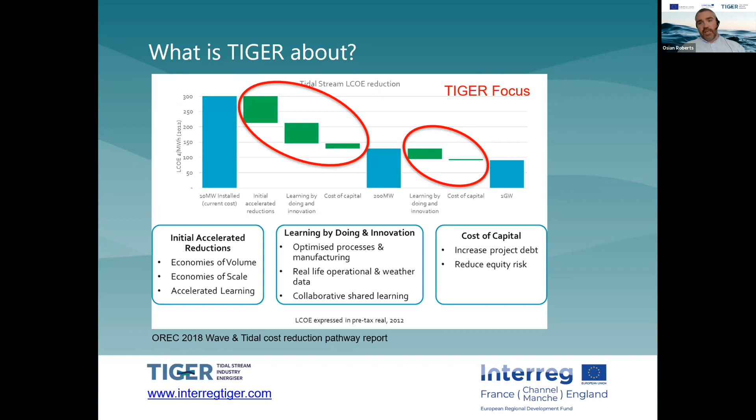And if you couple these things with a learning rate, you'll see that by the installation of gigawatts of capacity for our industry, we're looking to bring the cost of energy down to £80 per megawatt hour. And to do that, Tiger has this range of work packages, which is underpinned by knowledge transfer and the collaboration between technology developers and academia.

So the first one, we're looking at learning by doing, which is work package 1, tidal energy site development and deployment in those respective areas I pointed out in the slide earlier.

Second, work package 2, sector and technology development, and bringing in these innovation aspects to the sector and working together with supply chain to provide that innovation and to improve component efficiency, process efficiency, and form clusters that can enable the development of our industry.

Cost reduction analysis, where we'll bring all that learning together and form an evidence case rooted in policy, which can act as a robust base to bring commercialization into the fore for our industry.

We're looking to work with the supply chain, which is why we're here right now, specifically on the development of optimized components and processes. We're open to working across all organizations from across sectors.

And I think the last thing to say is that we would like to collaborate as part of Tiger. There's an opportunity to collaborate with all like-minded projects and associations.

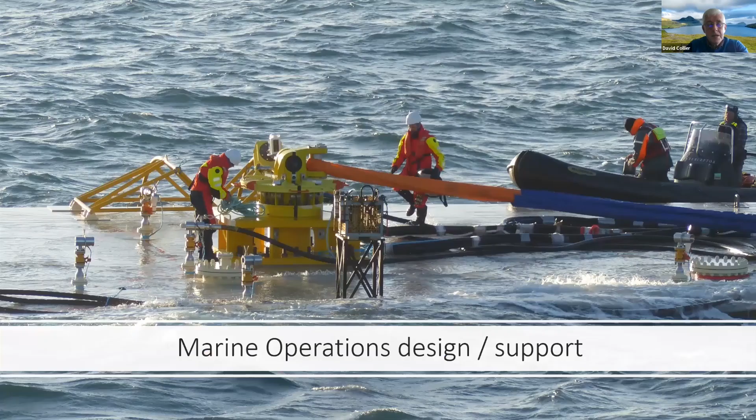The first thing I'd like to talk about is marine operations in the respect of design and support. Currently, tidal energy development companies are relatively small, sort of up to 100 people, and in most cases that doesn't give the opportunity to have a fully equipped full-time marine operations team, and so it's necessary to rely on the industry, the contracting industry, to provide that support in most cases.

The key lesson learned here is to select your contractor very carefully.

There are a lot of differences between installing in a tidal flow and what people do in the oil and gas industry. So there are some areas where it reads across quite well, and there are other areas where it doesn't read across very well at all. So the word of caution there is to look at the experience of the marine operations team, and I think you'll hear about that a little bit later on in this webinar.

In terms of vessel supply, again, there are no purpose-built specific vessels currently available for the tidal energy industry. So we're reliant on vessels from other industries, mainly oil and gas and increasingly the wind industry. The way that we deal with this in Minesto is that for every significant operation, we work with a broker. We provide the broker with a specification of our requirements. He goes out to the market.

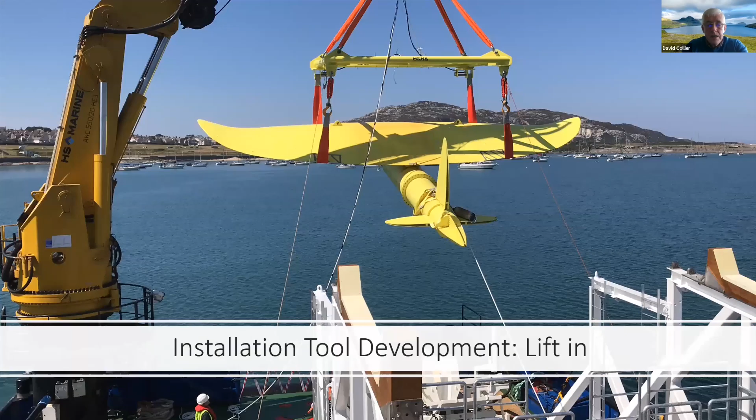Moving the subject a little bit to development of tools, in particular in relation to offshore installation. A couple of years ago, we thought this was the best way to install kites, which was to lift it into the sea and lift it out of the sea, and we worked closely with marine contractors to develop this system for us. Learning by doing, as Osian mentioned, is one of the key aspects of our industry, and we learned by doing this that in the summer when it's flat calm, it's great, but as soon as there's a small swell or a little bit of wind, it's not so good.

So we ended up changing the process from lifting to a towing process. So we're now towing to site. This meant that we changed the method of installing the kite, or connecting the kite to the tether, from the deck of the vessel to the foundation, the point where the tether meets the foundation.

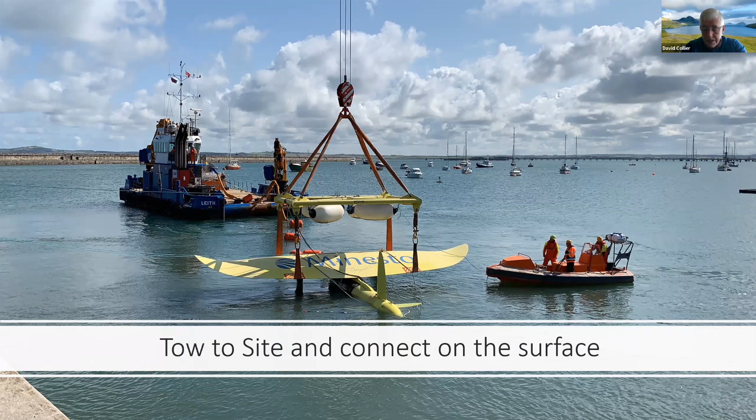So this in turn created another opportunity, and the opportunity was to develop a system whereby the connection to the foundation could be done with a fairly limited capability vessel. So it's all about reducing LCOE, as Osian mentioned. So we want something that's quick, safe, and affordable, both in terms of the actual connection system and in terms of the vessel system. And again, here we worked very closely with a supply chain partner to develop this system that's now been tested and proven to be very successful.

So it's not all about installation tools. There are other areas where working with the supply chain we found is the best way for us, and I can think of a few examples. Probably the best example is in the areas of consent, EIA consent, and environmental monitoring. In these cases, there's a lot of experience in the industry, and most of that experience is concentrated in a number of experienced consultants, and we work very closely with one of these consultants to develop all our consenting and monitoring going forward.

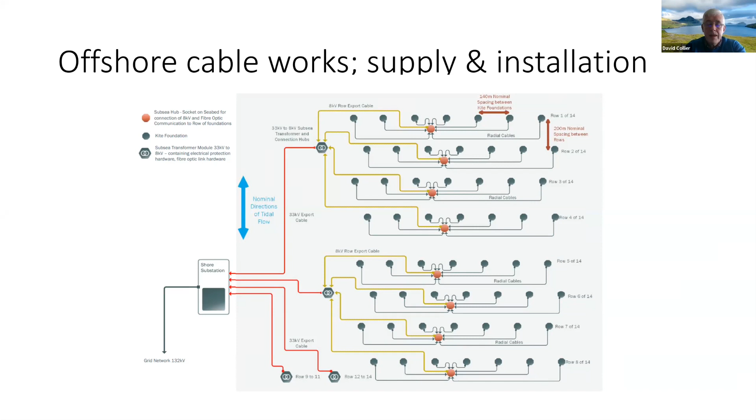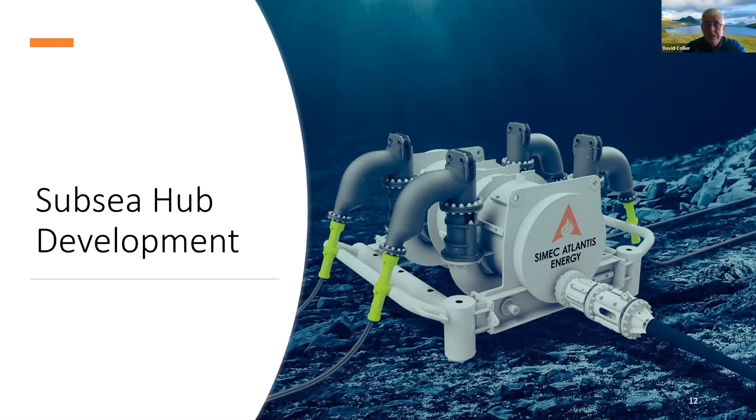In terms of subsea hubs, that process has started. You're probably aware of a subsea hub that was recently installed by SIMEC Atlantis in the MeyGen field. So that is the beginning of the process, and that will continue till we get systems and components for all arrays. In terms of offshore equipment, onshore equipment, up to now, where demonstration projects are a small number of turbines, quite often single cables to shore, the onshore equipment can be housed quite easily in a container like we've got here in the Faroes.

Moving forwards, this will not be sufficient. When we scale up, we'll need more equipment onshore and substations as well. So other electrical equipment needs to be engineered, contained and installed. Again, there's a big area for the supply chain to both help and supply equipment into these projects.

Cable landing, always an interesting talking point. Two main ways of doing it: trenching, which we've done here in the Faroes, or doing an HDD. Both require some level of expertise and some level of local content, and again, opportunities for the local supply chain to assist in these matters.

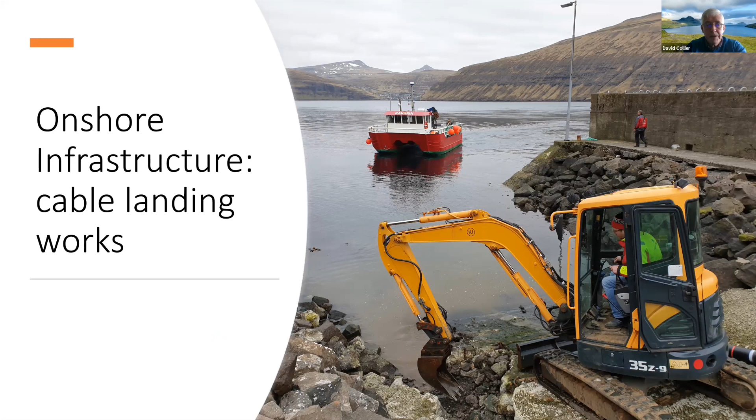Finally, assembly and maintenance. At Minesto, we have built a purpose-built assembly hall in Holyhead, which will be used for assembling our kites going forward. Clearly, there are still issues with transporting them to the sites, and for operations and maintenance, we're not anticipating that we're going to bring everything back to Holyhead. So there is a requirement for local facilities wherever the projects are, and I think that will probably relate to most tidal energy projects.

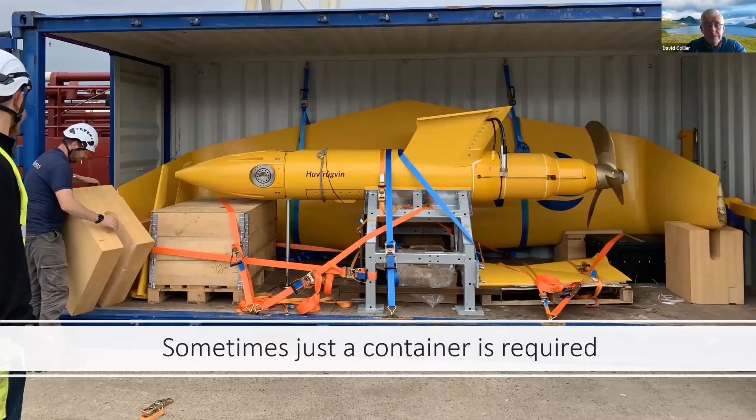If everything's small, like we've got here with our DG100, that quite nicely fits inside a standard transportation container, and we can package it off, send it off and reassemble it on the quayside when we get there. But that is not necessarily the same for obviously larger components. So there are opportunities there, both in logistics, transportation, and assembly facilities. This can be something simple like a quayside at any port facility.

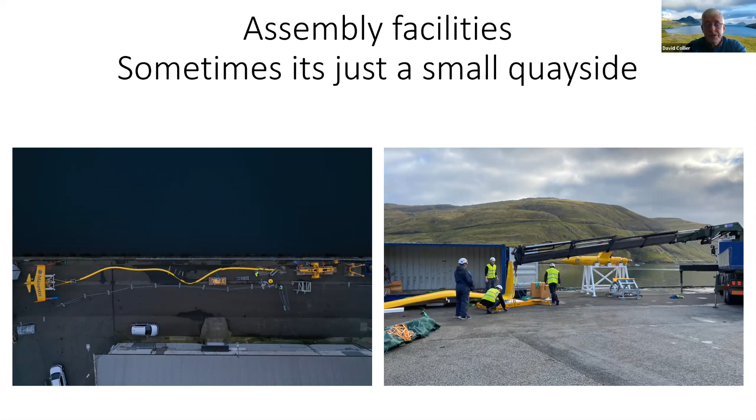Here is where we're working in the Faroes. We just hired a quayside, made that available to us, and we've rented a small space in a local facility where we can get undercover to do small amounts of maintenance. That's sufficient for now, but it won't be sufficient for the future. The future probably looks a little bit something like this, where you've got infrastructure requirements, cables to be laid, and so you may be looking for a much larger heavy lift offshore quay. Again, opportunities locally for this, and opportunities to develop the concepts for how this works.

So a very quick whiz through supply chain opportunities. I hope that gives you a better understanding of what we had to develop and our needs and requirements.

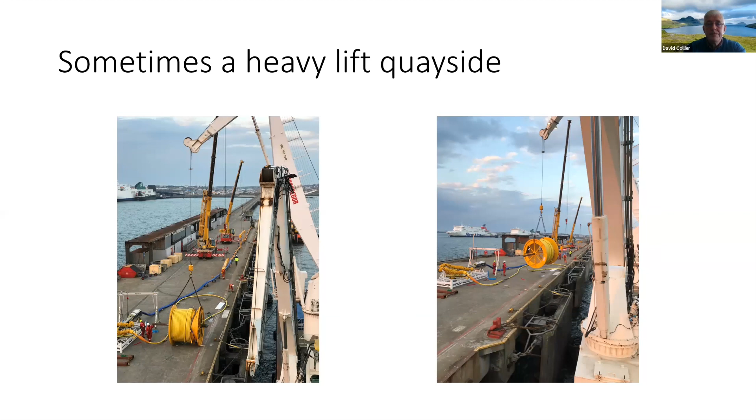My name is Darren Hayes, and I'm Technical Director at Dublin Offshore. Very happy to speak to you all today and tell you about the experience I've had working on various tidal sites across the world. So in terms of agenda, I'd like to first give a brief introduction to Dublin Offshore and give an overview of some of the work we're doing at present. We'll then take a bit of a trip down memory lane and talk about some of the lessons learned from undertaking tidal projects in the English Channel sites.

So Dublin Offshore was founded in 2018. As partners, we decided to combine our experience, which included project and product development across a wide range of marine technology, from fixed wind, tidal, and more recently, floating offshore wind. In particular, on this slide, I've highlighted where this experience has involved work in tidal sites off the Brittany and Normandy coasts, which dates back to 2011. Our mission as a company is to make a contribution to the deployment of offshore renewables. We're very keen to use our experience in the development of marine technology, product design, engineering, and marine operations to try to help solve some of these industry challenges.

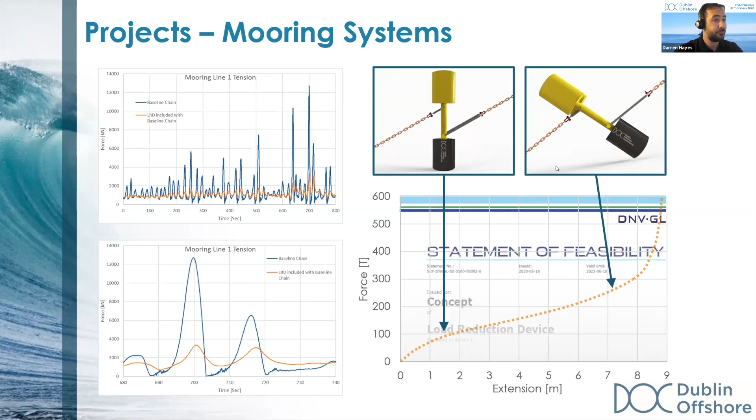So following on from that, we designed, built, and installed the quarter-scale prototype off the west coast of Ireland. So here you can see the device, which is currently under operation. As of today, we're 70% through our test program, and we're capturing a wide range of data from mooring loads, accelerations, and environmental conditions. And you can see some of the load data here, and you can see we were able to pick up Hurricane Epsilon as it passed through this week.

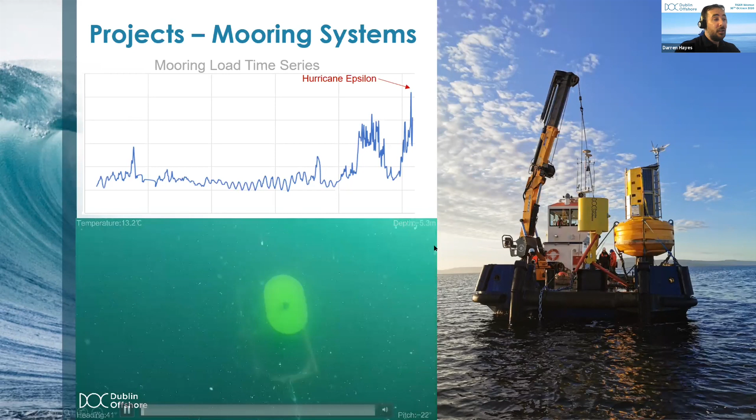So that's just a quick snapshot of our current activities. In this project, I guess we went from an idea to TRL7 in 7 months. The ability to achieve that has come from some of the experiences developing innovative marine technology, which we'll now rewind to. So the English Channel sites I've worked on are Paimpol-Bréhat and Raz Blanchard. Paimpol is a test site, and here you have good currents, but relatively benign when compared with some of the big commercial opportunities such as Raz Blanchard or the Bay of Fundy. At these sites, peak annual speeds will exceed 10 knots, and daily peak speeds rarely go below 7 knots.

I guess, as David alluded to, our starting point for this was coming from general marine operations, the golden rule for cable lay and offshore construction: stay away from high tidal current speed areas. So to work on these sites, we had to solve some fundamental challenges: how do you lift a 1,000-ton foundation, which was required for stability of the turbine? How do you control your position when you've got a 20-meter structure submerged in the current beneath the vessel? How do you connect the turbines to the grid? And most importantly, how do you achieve all of this safely and repeatedly?

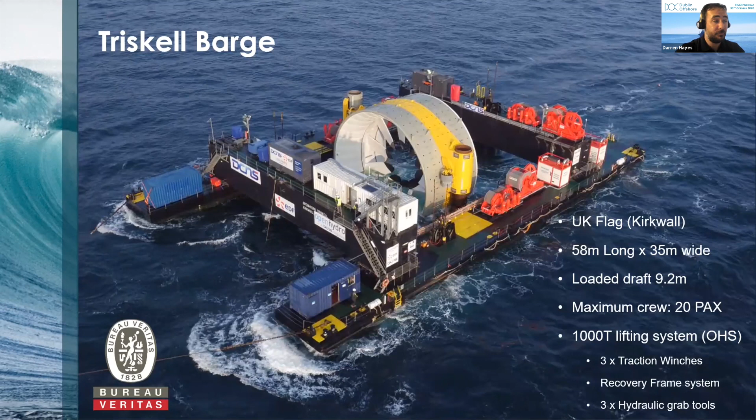So the effort that went into planning marine operations of this scale was significant and usually involved several months of preparation for a first-time operation on a given project. In terms of the process, we'd start by producing general storyboards and put that to a wider group to get expert input, build on things that we had learned in previous operations.

We'd also have risk-based workshops to discuss the proposal and always considering the what ifs, like what if we lose position at this critical stage? What if we run out of time? We'd carefully consider how long every activity takes and how it fit into the overall tidal window.

So when selecting the tidal window, you'll have an upper and a lower tidal speed that you can work in. These are usually determined by either the station keeping ability of the vessel or the allowable drag on the lifting system. So the shortest time between the two most constrained events gives you your tidal window. And in this particular case, it was roughly about 90 minutes. We always kept 20 minutes of that back in case we needed to abort at the latest time of the operation. So everything had to be done within that remaining time.

It was very important, I guess, at this point to have key stakeholders brought into the process. This would have included the marine superintendent, the marine warranty surveyor, and the client. We'd then take away some of these draft plans and undertake the engineering and the analysis. So tools we'd have used here would be OrcaFlex, SESAM, ProteusDS, other well-known packages.

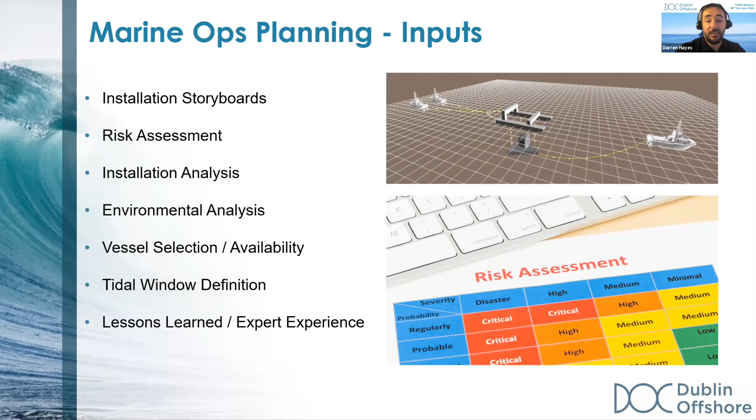We'd also perform significant analysis on the environmental data that we captured on the site, such as from the ADCPs or wave riders, to get a better understanding of the tidal regime, the sea states, and the general environmental conditions that we'd be up against. All this analysis then would allow us to layer detail onto the initial storyboards, which ultimately became the method statements.

We'd then have the final risk assessment. And with that, we'd have a pre-prepared contingency plan should any of those risks materialize during the operation. So an example would be, we'd have exact instructions laid out on what to do if the winch lost power while the turbine was lowered. We needed these pre-planned, as there really wasn't time to figure it out on the site, because ultimately we'd have to be out of the flow prior to the turn of the tide.

Finally, another output could have been a recommendation for marine trials. So if there was an aspect of the operation that couldn't be solved with planning, discussion, and analysis, we'd often include a day of trials prior to the operation. So this might include mimicking the operation or a specific part of it in a more benign current prior to going out onto the actual site.

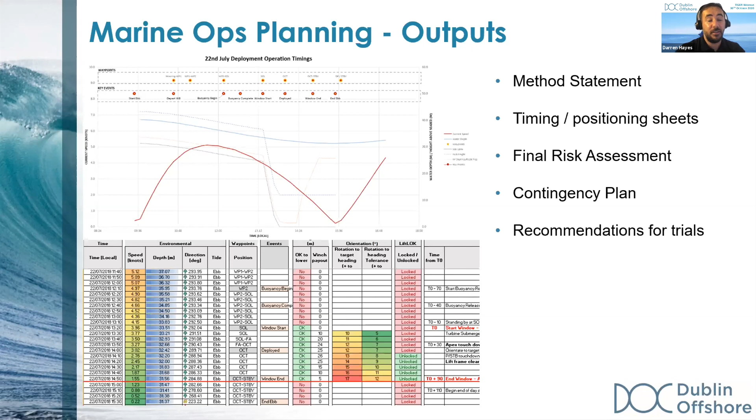When we spoke about lessons earlier, we didn't just rely on human feedback to improve our understanding of the operation. Where possible, we collected and analysed data from the operations to make assessment against our initial analysis and calculations. Some examples here would have been the loads and the winches at various stages of the operation. So we'd inspect this data and check it to see if maybe we could lower the turbine at an earlier point of the tidal cycle, or we'd analyze the dynamic amplification factors to see if we could increase the allowable sea state that we could work in.

Another aspect we looked at was tow bridle tension. It gave us a better understanding of the amount of power we needed to maintain position, and compare that to the power that was available in the installation vessel. So the intent for all this analysis was to open out the tidal windows and to increase the accessibility on the site to as high as possible.

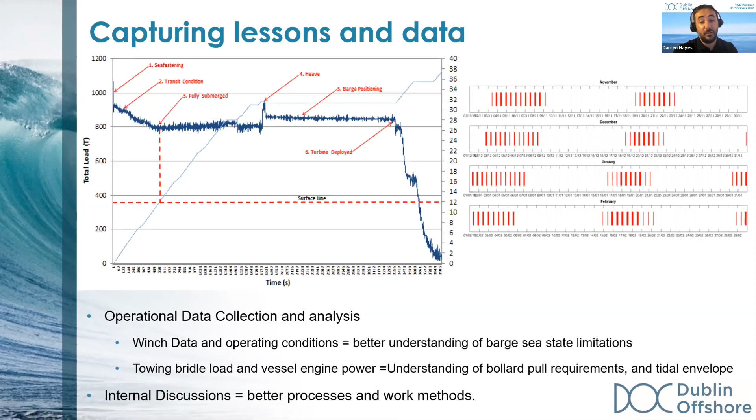So just to conclude, I've listed some of the key takeaways for you. They might be interesting in the future endeavours of those involved with the Tiger project. In terms of mobilisation, the area is very well served with really good ports in Brest or Cherbourg, really good water depths there and infrastructure. Crane capacity used to be an issue, but this is probably no longer the case because there's some very large offshore wind being mobilised from the area at the minute.

In terms of marine operations, the key one is just good planning is essential. The sites are full of potential, as you all know, but they're also full of danger if you don't know what you're up against.

So I'm Erwann Nicolas from Sabella. I'm head of the research and development department, and I will present our feedback and emerging needs on offshore operations for seabed arrays. In summary, we will first present Sabella's company, our technology, our D10 project presentation and feedback, the emerging needs, and the main project and procurement opportunities.

First, Sabella is a company working on seabed tidal turbines, and we installed our first one in 2008, which was a small one, and was the first tidal turbine installed in France. The second one is a bigger one, the D10 machine, 10-meter diameter and 1 megawatt power, installed in 2015. It was the first tidal turbine to supply electricity to the French grid. Sabella was created in 2008. We are 25 employees. We work on engineering, procurement, construction, and installation of tidal turbines. A turnover around 1 million, and a shareholding structure composed of industrials, financials, founders, and also management.

Sabella has cutting-edge technology for a differentiated solution. We use a horizontal axis turbine with fixed symmetrical blades and no yaw system. This was to improve yield, proven design and robustness, so that we don't have a yaw system on the turbine. We have a low rotation speed, a direct drive generator with permanent magnet, so we don't have a gearbox, and that way we avoid wearing parts.

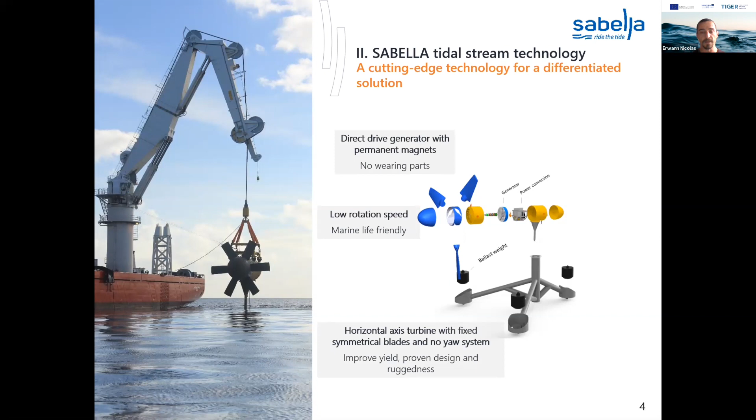We also have an onboard conversion chain and transformation with complete redundancy. We integrate the conversion system directly so that we can provide a stabilized power, stabilized on frequency and voltage at the end of the turbine. So it would ease the mutualization of turbines for arrays.

And we have a modular architecture composed of a steel structure, a steel foundation, ballast weights, and a turbine that can be removed one by one. This is done for installation and to reduce the cost of the installation. We will see that later. This is based on our experience. And we have a gravity-based support structure with ballast weight, which is good for environmental impact.

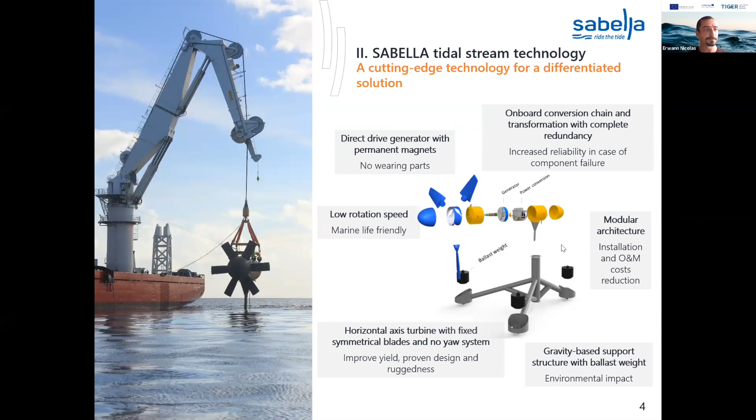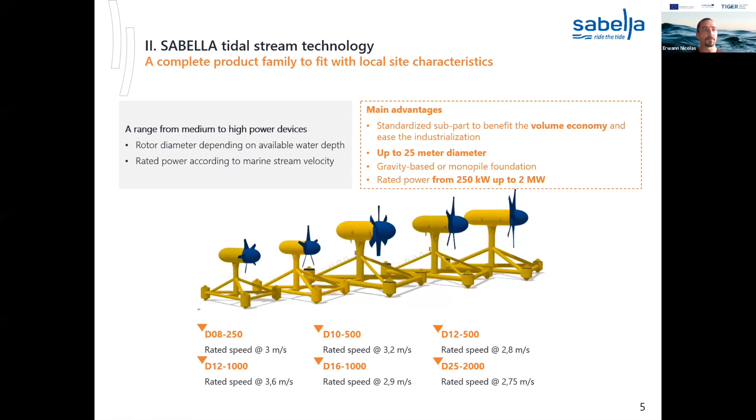Sabella works on a complete range from medium to high power devices because we want to adapt the rotor diameter depending on available water depth and rated power according to marine stream velocities. Sorry. The main advantages are that we want to standardize subparts to benefit from volume economy. Up to 25-meter diameter, we can adapt gravity-based or monopile foundations, and we can address a rated power from 250 kilowatts up to 2 megawatts.

Our main project actually is the D10 project, which is installed on Ushant Island. 900 inhabitants, 4 power gensets, and around 2 million liters of fuel consumed per year. Sabella's project on this island is based in the Fromveur Passage, 55 meters deep, 2 kilometers off the shore, with up to 9 knots current velocity. This project was supported by the French government and Brittany region.

This is a 1 megawatt peak machine. In 2015, we deployed it in the Fromveur Passage and connected it to the electrical grid of Ushant, which is a weak and fragile off-grid network. And we operated and monitored the turbine during 12 months, the 12 months authorized period.

So this is the machine. The height is around 17 meters, and 20 meters large on the basement. The overall package is around 400 tons, with a 10-meter diameter rotor, 1 megawatt peak power, and rotation speed from 5 to 15 RPMs.

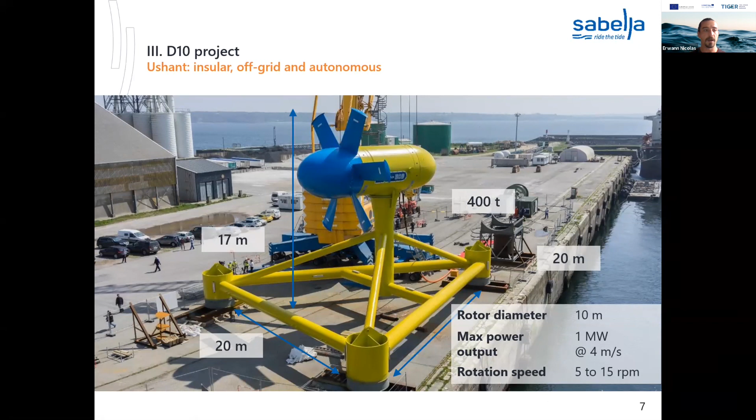The first operation for this program was to install the export cable. We use a DP vessel, but without a dedicated crane, and we also use divers.

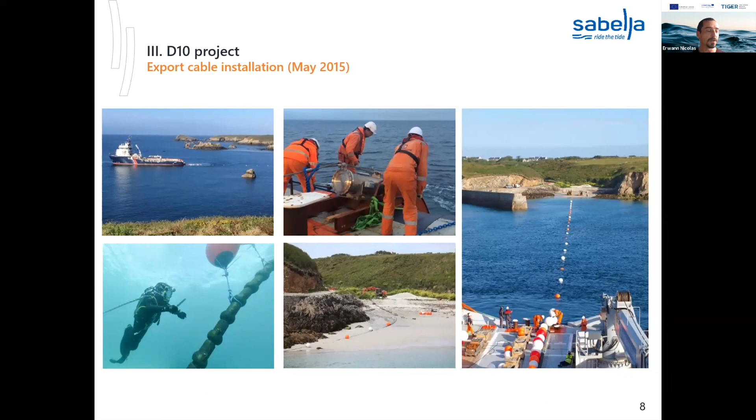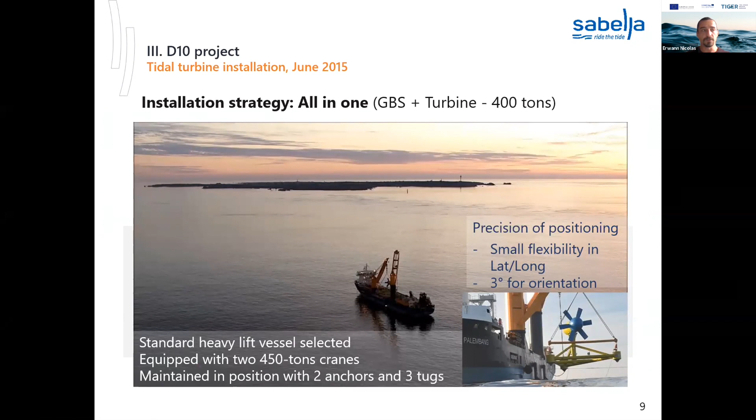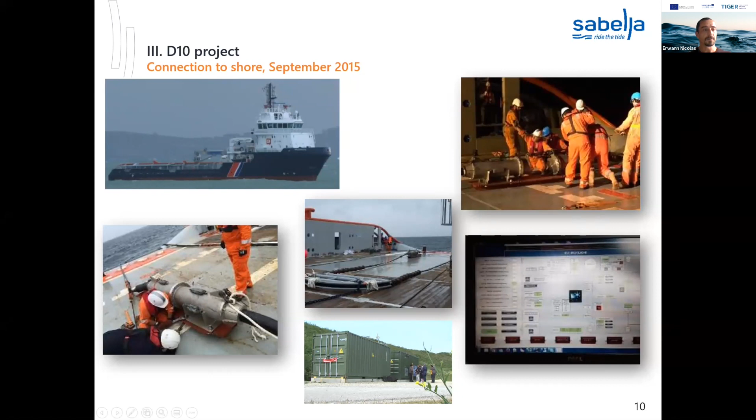The next operation was connection to the grid, so we used a DP vessel also, but without a crane, to recover the ILT on the seabed and to connect the jumper cable from the turbine to the export cable. This was done in September 2015. Onshore, we have 2 containers, one for monitoring of the machine and the other for security regarding the grid.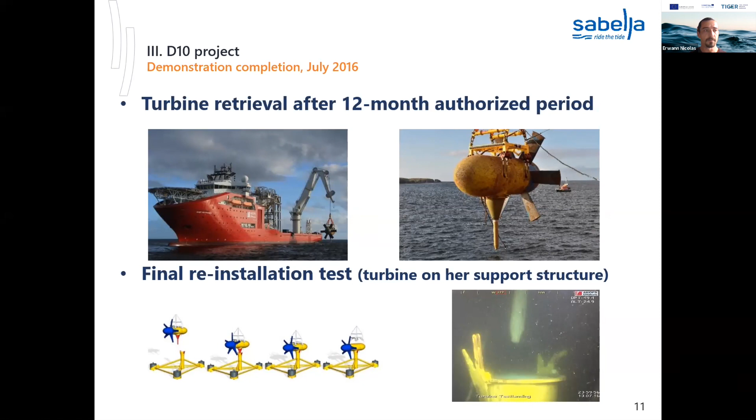After demonstration completion, the turbine was retrieved after a 12-month authorized period, using a DP vessel with 400 tons capacity, and it was a success. We also tested the reinstallation of the turbine on the basement. We recovered the turbine and retried to put it on the basement, and it worked perfectly, because the DP vessel has a great capacity of positioning.

The environmental constraints we have in this kind of area are the complexity of operation, as we are in strong current areas, and the assessment of feasibility and safety due to limited operation windows, because we have a limited number of neap tides. We have to work during a slack tide of neap tide, and these have a limited duration, around 1.5 to 2 hours. We also have the sea state and wind weather windows to be correct to operate. So this is a great limit to having an intervention on the machine.

The feedback on the operations we made was first that the anchored vessels are not adapted for this operation. The vessel we used for the first installation was not able to maintain a position even with 3 tugs.

The improvements we applied for the following marine operations are, first, to choose an adapted vessel, a DP2 or DP3 vessel, with station keeping capabilities up to 5 to 6 knots. We also developed adapted tools: we use a LARS to recover the turbine, fixed on the crane of the boat. We also built a turbine offshore berth dedicated to offshore operation, and we included a work ROV on the DP vessel. We also worked on effective methods and procedures for optimization of the operation, with detailed planning based on current velocity prediction, which is very important, and detailed procedures on clear tasks.

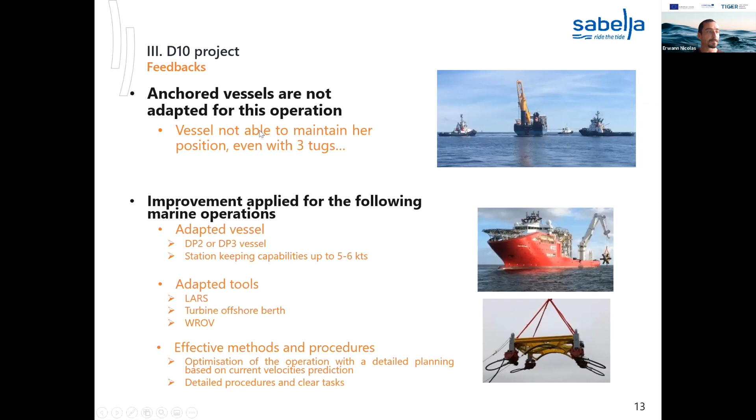The use of adapted vessels is mandatory for tidal turbines, but not so many suitable vessels are available on the market today.

The first problem we have is that the best DP vessels are limited to 5 to 6 knot station keeping, so we still need to operate during neap tides. After that, the best ROV can hold station in current up to 2 knots, so during neap tides this limits the work windows to slack tides. The best DP vessels with high crane capacity are used in the oil and gas industry, so we have expensive day rates and demob costs because the boats are not present in the area we work, and volatile prices dependent on oil and gas markets.

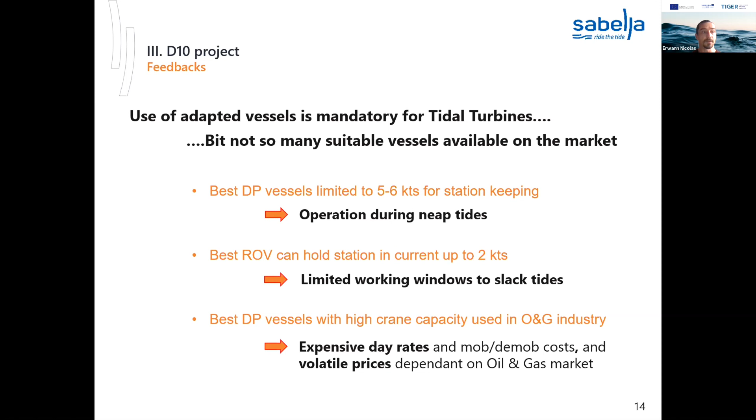So the emerging need is to reduce the cost of marine operations, which have a large impact on the global cost of a tidal project.

First, a modular approach for installation: to separate the turbine, the basement, and the ballast weight, making the installation in several packages to limit the package weight and to have lower lifting capacity needs for the DP vessels.

We also need to reduce offshore operation duration, so we work on development of wet mate connectors so that we don't have cable handling during the operation, and development of adapted tools for material handling and positioning. This is to combine with modular installation, and has to be worked on with marine operators. The aim also is to avoid the use of ROVs, so to adapt positioning solutions directly on the tools.

The next step, probably not today but for array deployment and maintenance, would be to work on dedicated vessels and ROVs for marine renewable energies, to have extended operational windows, to increase site accessibility, to reduce downtime and related costs, and to reduce day rates. The final objective is to have a competitive LCOE for tidal.

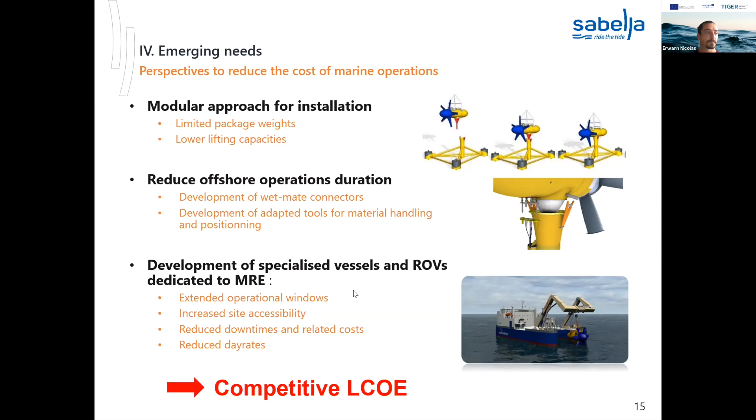The main project we have, the first one, is integrated inside the Tiger project. It consists in installing 2, 250 kilowatt machines. The procurement opportunity is the installation of 2 turbines and 2 export cables. What we want to address in this project is innovation to reduce the weight of the package under 50 tons, to address lower capacity crane vessels.

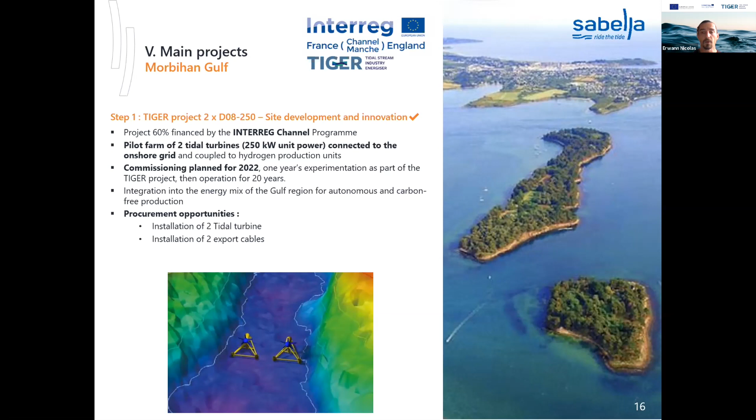The first step would be installed in 2022 during the Tiger project. The second step is to add 18 machines on this first site to have a 20 machine array. For this, we will have 2 subsea hubs to interconnect 10 machines, with installation of 18 turbines and 2 export cables. We want to mutualize the export of the 20 machines on two export cables.

The third step is to work on the second site inside the Gulf, Morbihan Gulf, and to add 20 tidal turbines on this site, with 2 subsea hubs also on 2 export cables. This is planned for 2030.

The other project is the PHARES project, which is a second step of the Ushant project. The aim is to install 2 tidal turbines, but inside a global low carbon solution with the deployment of 2 tidal turbines, 1 wind turbine, solar panels, and energy storage capacity for a 20-year period of operation.

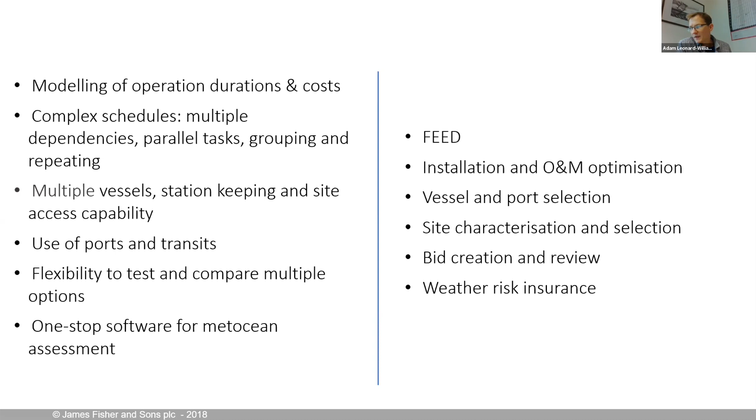So what I'd like to do is just go through with you how the software kind of works, what it can allow you to do, and then give some examples of how it might be used in the future for developing arrays and what it might be used for.

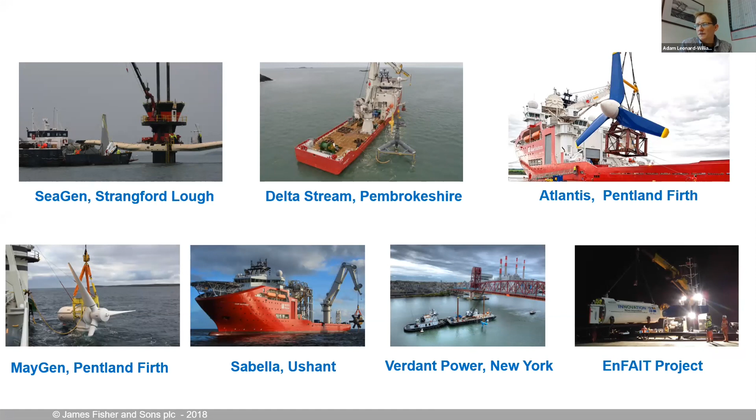So the way it works is it's all a graphical user interface, so it's all nice draggy, droppy, clicky kind of stuff. So first thing you do is build a nice map of what you're doing and where it is, so your turbine locations, how you access your ports, and where you have metocean data.

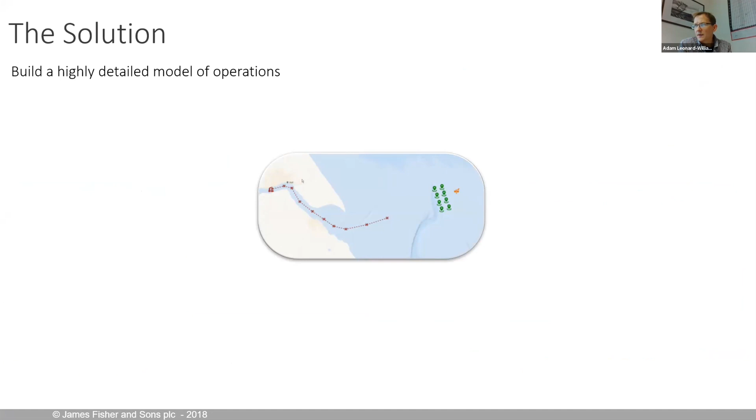The next thing you do is set up details of the vessels you're using. In this case it's offshore wind, but it could be anything. So do you have jackups? Do you have multicats, CTVs, other support vessels? What are the vessels' transit speeds? What are their station keeping capabilities? Are there any site access limits that you need to consider? And any vessel costs that you want to model?

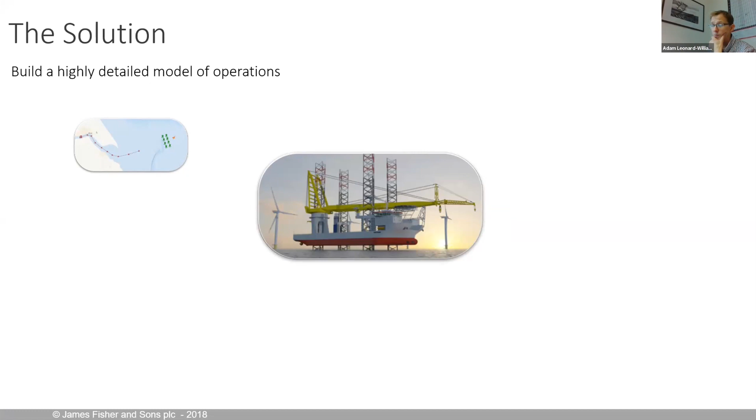And then you actually build this model of your operations. This can be as complex or as simple as you like. If you were just wanting a simple assessment of a couple of weather windows, you can do that. If you wanted to go down to the granularity of actually properly modeling a full storyboard operation, then you can, down to the last sort of 5 minutes, attaching something to a crane. It's up to you, and you can create really complex models if that's what you need to do. So things happening in parallel, various complex dependencies can all be built into it.

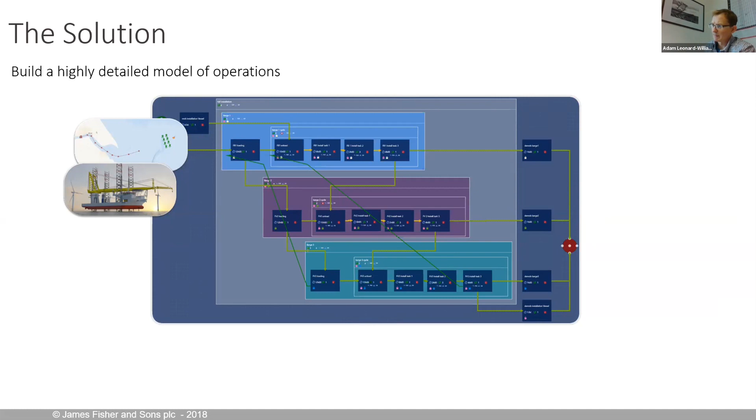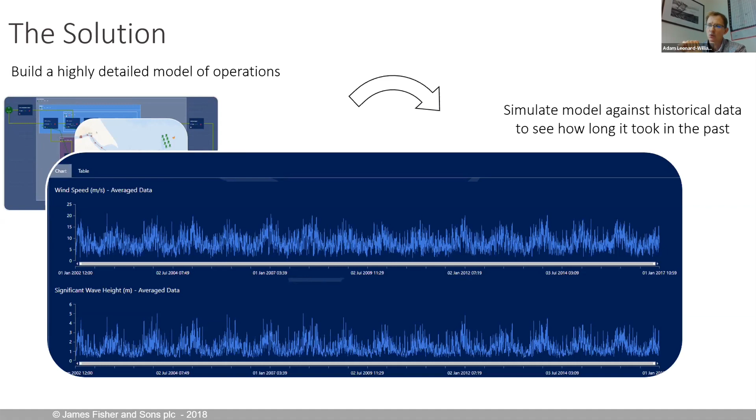So once you've built this model, what the software then does is essentially test it against long-term hindcast weather data. So the question you're asking is, if I've taken this operation, if I'd done it in the past 10, 15, 20, 30 years, how long would it have taken?

And then on the back of that, the software will spit out a whole range of really, really useful results and intelligence that you can then use. So standard stats on durations, exceedances, Gantt charts, and all sorts.

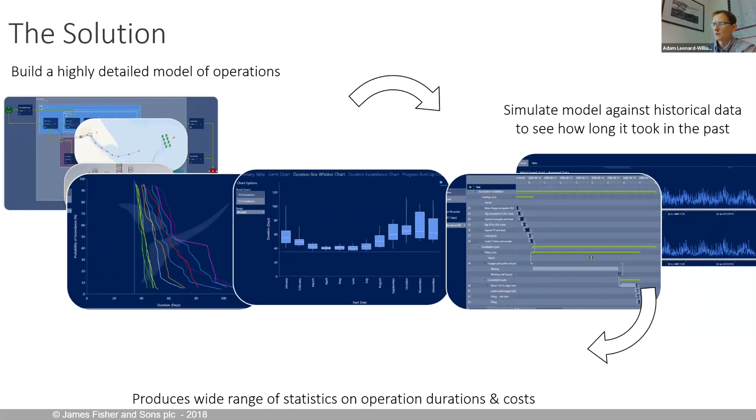So what this then allows you to do is maybe look at your results, go back into your initial model setup, reconfigure, change a vessel, change an idea for installation, rerun it, and then combine. Go through this loop a number of times, and ideally come up with some form of optimized model that you can then take forward in development.

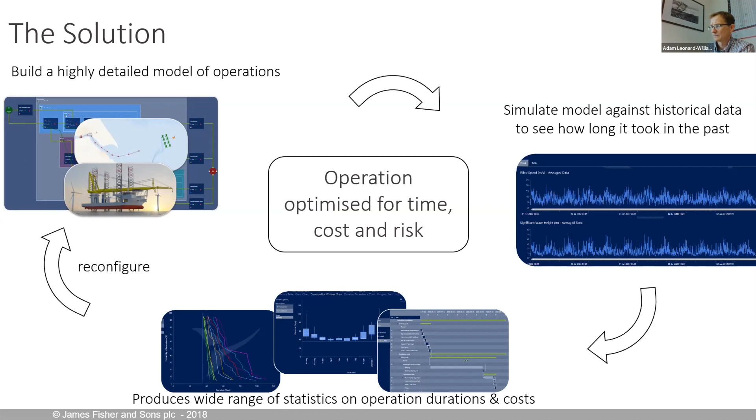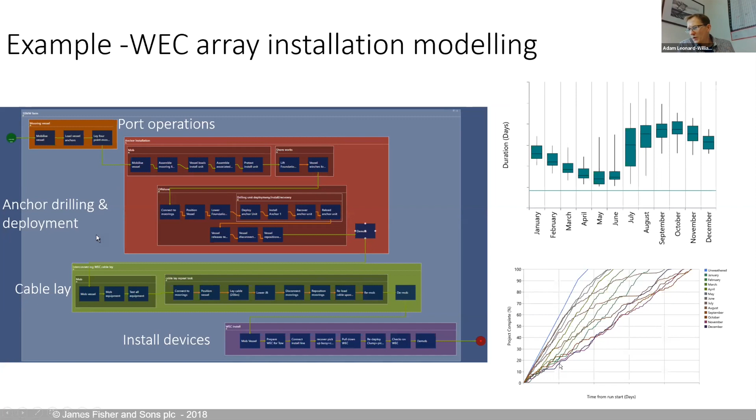So we modeled port operations, going offshore, setting up the foundations, doing the cable lay and the installation, so that the full installation was modeled. And we came up with interesting results on durations. You can look at standard kind of box and whisker plots, and you can also look at statistics on what are your timescales for reaching certain milestones within that deployment.

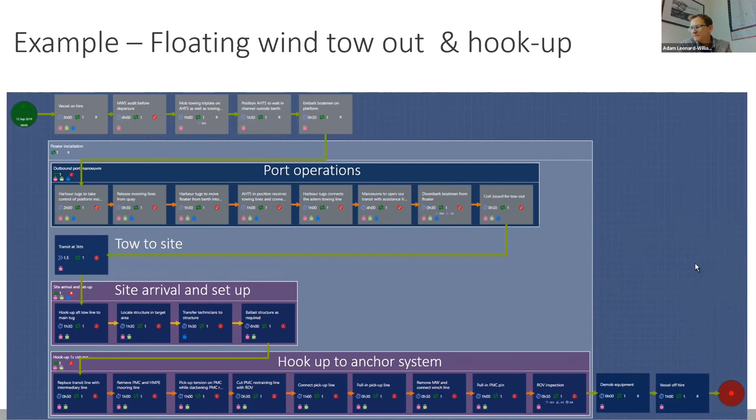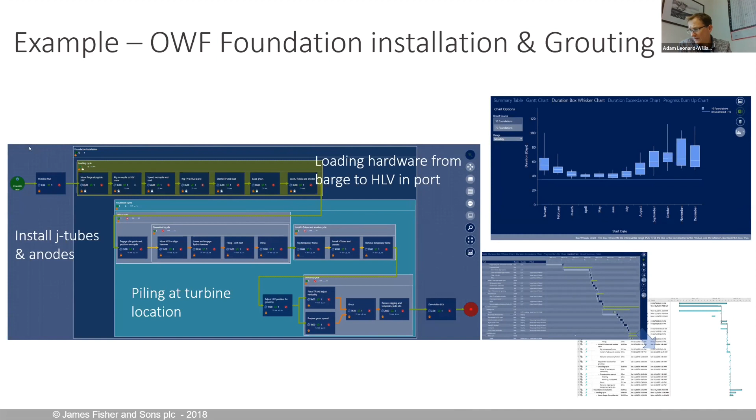And again, offshore wind is now being used widely by a number of developers in modeling the entire installation campaign, from the cabling to the survey, and in this case looking at foundations and piling. So modeling the sequence of 2 vessels, a heavy lift vessel and a barge, transiting offshore and onshore and back to base to reload, coming back offshore, and installing multiple foundations and doing the piling and grouting.

So what I've done for this talk is built a relatively crude model of installing some devices off the north coast of France. You guys will be familiar with this. You have to excuse the fairly crude nature of it. I've kind of made up some of the stuff, but it's for illustration's purpose.

So what I've done is I said, okay, I'm going to install 10 devices here, and I'm going to run with 2 vessels. One's going to be installing the foundations, and another's going to be installing the actual device. And initially, the vessel can install just 1 foundation and 1 device at a time before having to return to port to reload.

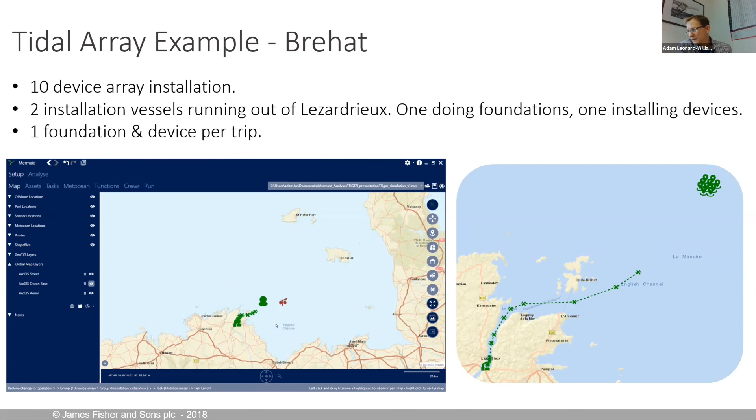So you can see the map view within the software here, and how that's going to zoom in. You can see the vessel transiting in and out of Lezardrieux. The storyboard looks like this. So we've got the vessel doing the foundations is the red set of tasks, and the vessel doing the turbines is the blue set of tasks. So it's relatively straightforward.

So the vessels each mobilize or reload in port. They transit offshore, connect to some moorings, and then lower foundations, do an ROV survey, and then return to port to reload. Meanwhile, the vessel with the device transits offshore, gets on site, rigs to a crane, positions the turbine, and then again an ROV survey to finish up with. And it does this loop 10 times to complete the array.

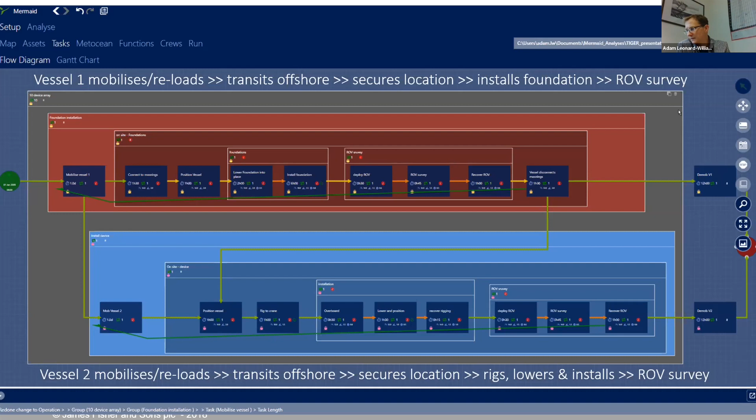A little bit more detail about the parameters and what I've done within the model. So typically the weather limits are ranging between 1.5 meters to 2 meters on HS. Current speed is between 0.5 meter and 1 meter per second, 0.8 meters per second. This is because the current data I've got is a little further away from the site, so it's a little lower than what you would actually expect, but it's in there to give the current speed impact, and a wind speed limit of about 10 to 14 meters per second, depending on the task.

And we've got some fairly crude tasks, with durations between half an hour and 6 hours, but in reality, you break this down into much more detail and use it as a proper storyboarding process. Certain tasks are grouped together. So these tasks here are grouped together, so they must happen sequentially without any break. Likewise, the same with the ROV survey. Once you start this lot, you have to complete. And we've also put some marine warranty restrictions on some of these tasks. We're actually looking for a longer weather window than is actually required.

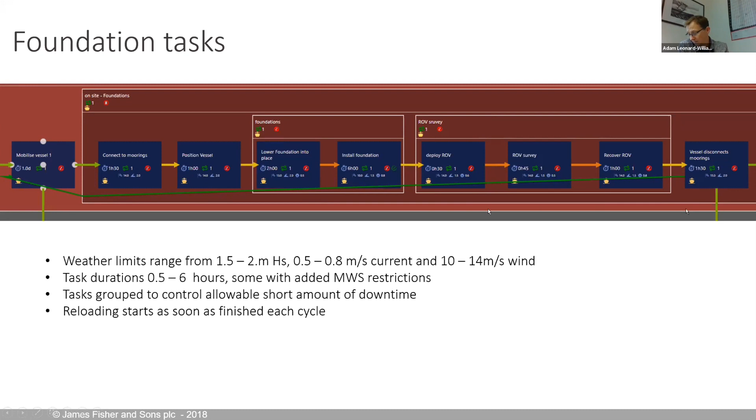A similar story with the device tasks. Positioning, overboarding, and then recovering, and then ROV survey, similar sets of limits, maybe some slightly lower ones on the tidal currents and wave heights. And so that's the model.

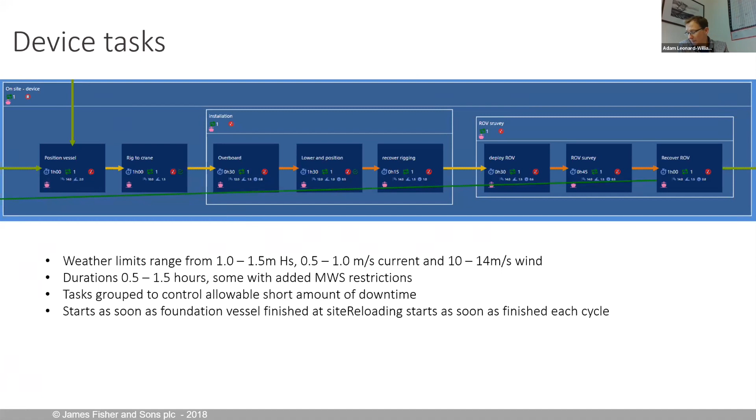And then we ran that over 10 years of historical hindcast data that I sourced from the guys at DHI. And what Mermaid allows you to do is actually interrogate that weather data, first of all. So you can look at time series of data. You can look at frequency tables and exceedance graphs. So you can get a good grasp of what the actual weather conditions are beyond just doing the model work itself. So you can get a good idea of what the ambient conditions are likely to be.

So you can see actually here, this is quite useful. The current speeds, the data I've used here doesn't really exceed 1.5 meters per second. So it's a little low compared to what you'd expect on site, but that's because it's come from a slightly further offshore location.

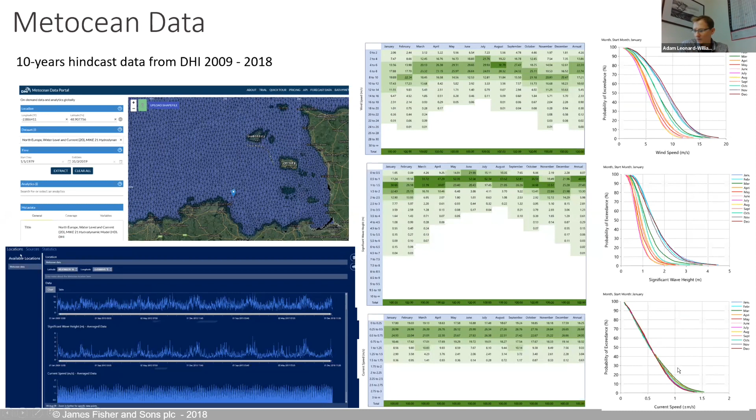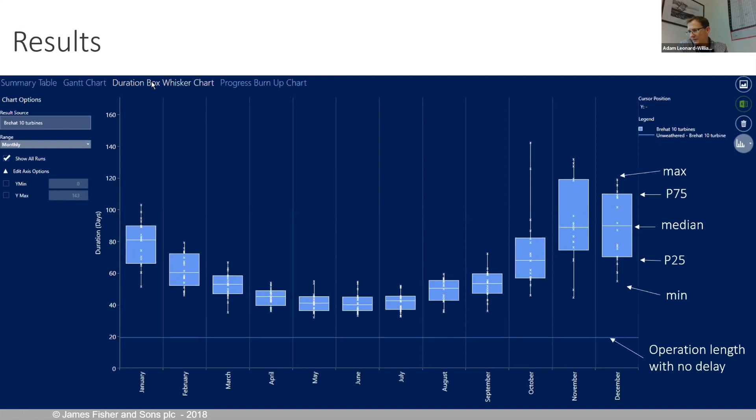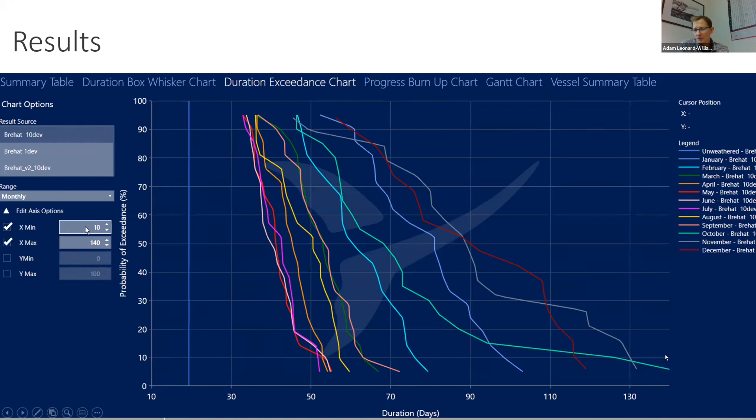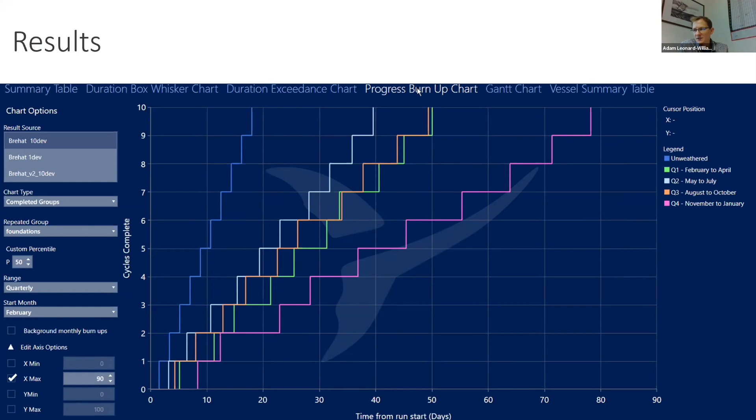Whereas if you start late spring, early summer, you're going to be going a lot quicker stepping through. So you can use this to gauge an idea of the speed at which you're going to go through each turbine. You can look at Gantt charts.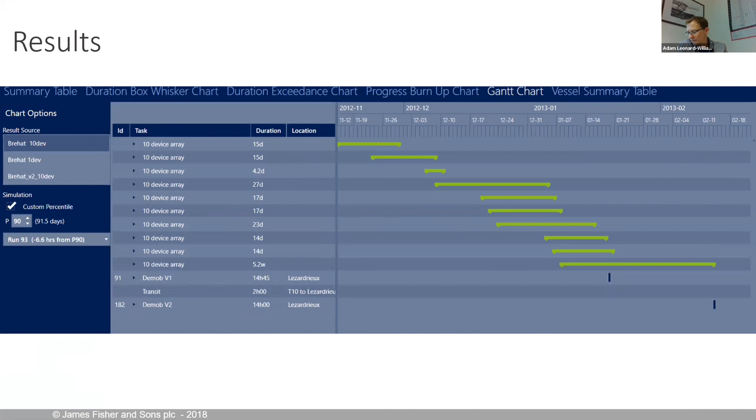So you can actually see how long each simulation took, how long each part of the process took, and you can see where the vessels are going, where the downtime occurred, and you can break that down into individual tasks. You can see essentially where the vessels are transiting, where they're waiting. So you can really drill down into each simulation, see what happened, see where the downtime occurred.

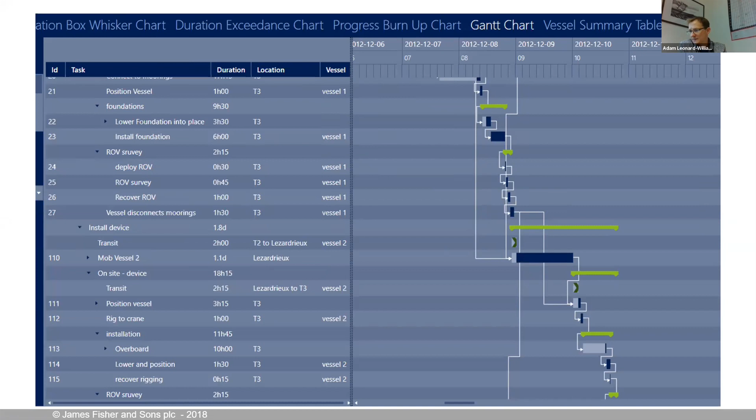So that was the basic analysis, what I did. And I thought, well, let's show how you can use Mermaid just to do some basic scenario testing. So, try different ideas, different options. So what I've done is I have used Mermaid to say, well, actually, let's see what happens if we install just one device and what happens if we install 20 devices to see how those stats on duration scale up.

I've also thought, well, let's just change the strategy on the vessels. So let's change the carrying capacity. So let's say the foundation vessel can carry 4 foundations, and actually the device vessel can carry 2. And then the third one I've done is actually just removing the current speed restrictions at all. So let's imagine a dream world where we've got a vessel that's capable of installing these things in any tidal condition. And then the fourth one is actually combining 2 and 3.

So I'll just go through this quite quickly. I'm aware of the time.

Different number of devices. So the turquoise blue is the original 10 devices, and then orange is 20 and green is 1. So, as you'd expect, the durations increase with the increased number of turbines and such like. But what is quite interesting is seeing, especially between 10 and 20,

when the downtime starts to really kick in because of the weather, in that when you start looking at August and September, with just 10 turbines, you can maybe get away with it. But with 20, if you start at that point, you're going to be looking at much longer durations because you're starting to run into the entire winter period. And actually for the one turbine, the spread is much less.

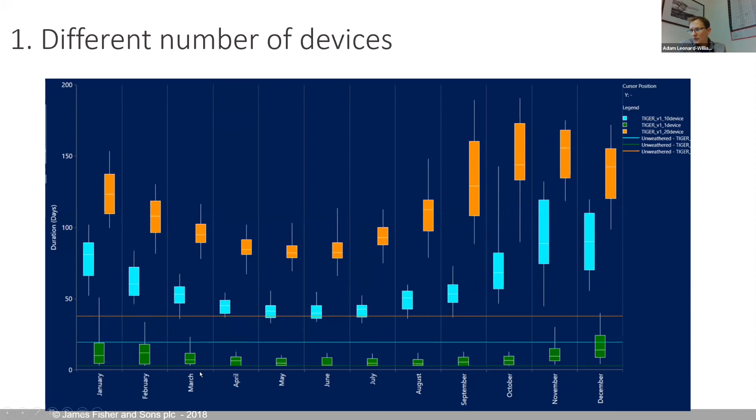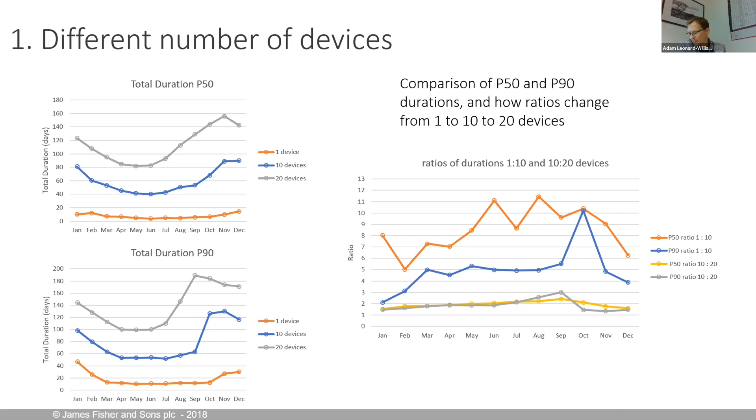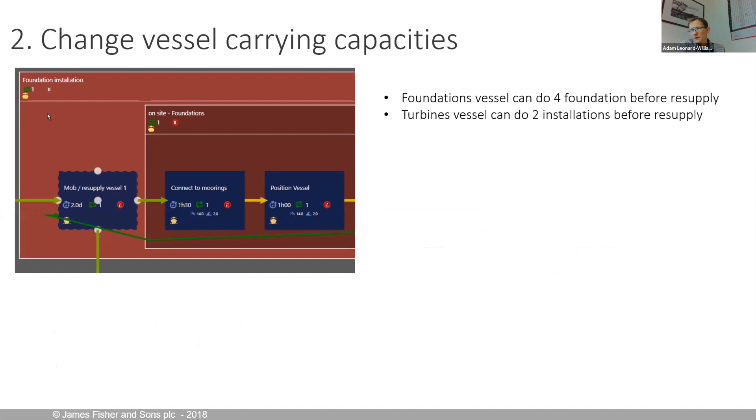So the second thing I wanted to do was just look at what happens if we change the vessel carrying capability. So this is really easily done in the software. You can just select a task you want to look at, and then you can tell it to only do this resupply task on every 4th iteration. So instead of doing it every single time, it does every 4th.

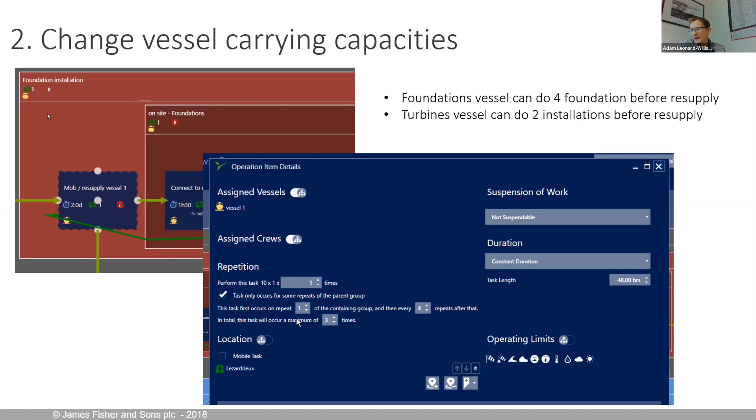So the supply vessel stays offshore and goes on to each successive location to carry out the installation. We set it up so the foundation vessel does 4 foundations and the turbine vessel will do 2. And this makes, again, a significant impact on the statistics. So you can see that by increasing your vessel capacity, you can bring your durations down quite significantly, in some cases by 20 to 40 to 80 days, depending on which simulation we looked at.

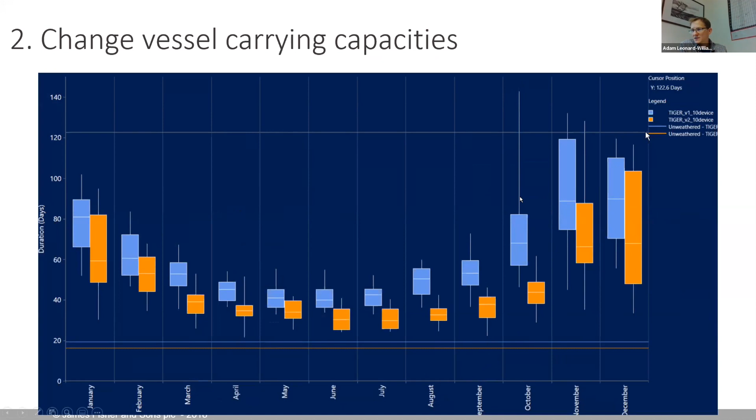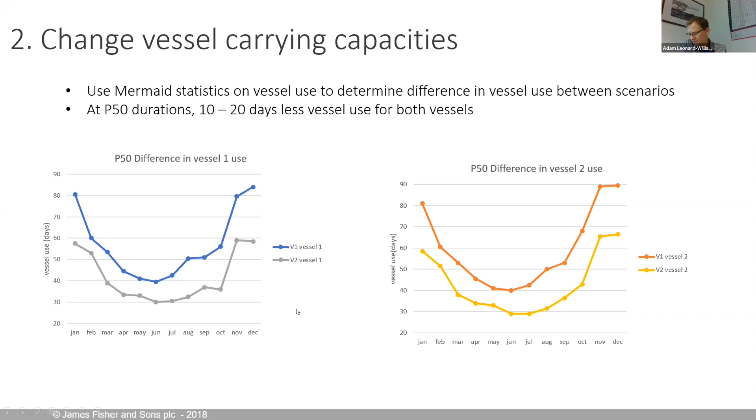And again, looking at a summary of the P50s, this is the P50s of the individual vessels. So one of the things that Mermaid allows you to do is look at statistics on vessel use. So you can see between each vessel, at the P50 level, we've dropped our utilization by 10 to 20 days, depending on the start month. So significant cost savings can be made by just looking at these kinds of things.

So the third one I looked at was what happens if we remove the current speed restrictions. Slightly unrealistic, but you could read this as saying, what if we just increase the current speed limit on our vessel? So if we had a purpose-built vessel for tidal device installation that meant you could hold station in much stronger tides, this could be the kind of impact that you could potentially have.

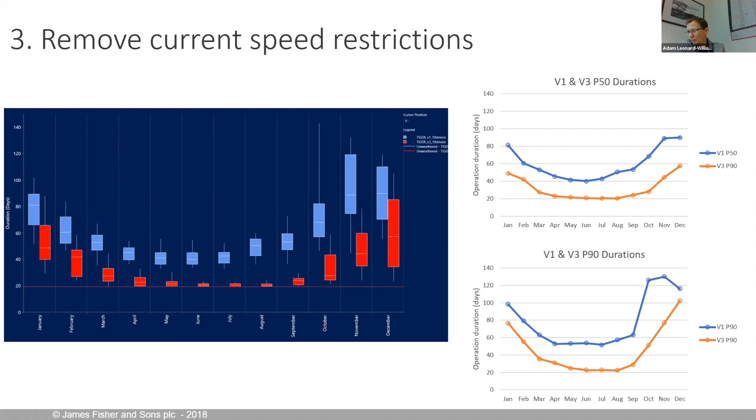And then finally, I combined all of those simulations. So what happens actually if we run it with no tidal speed restriction limits, and what happens if we run it with an increased vessel carrying capacity? And you can see here, you can use Mermaid to really nicely compare and contrast all these different options. So the blue is the original model. Then we looked at doing it with the increased capacity, and that's with the tidal speed limitation dropped. And then this is combined that lot.

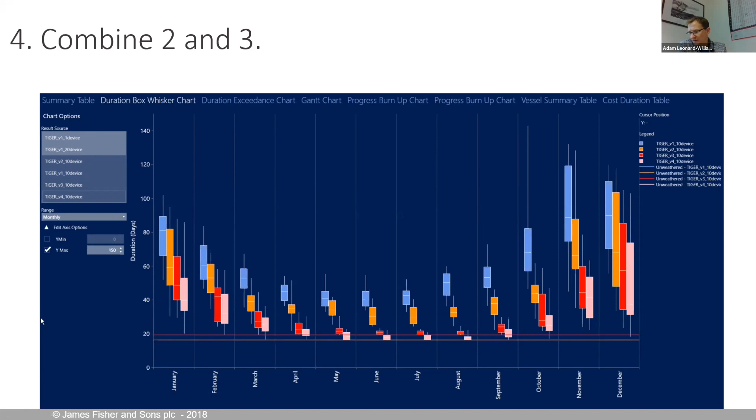So you can just see how, as you go through this iteration of using the software to test and compare different options, you can, in a short amount of time, gain some really valuable intelligence about where you can make some significant cost savings and where you can really gain advantage and make things more efficient. So that's the end of my whistle-stop tour of Mermaid, how it works and how it can be used in this kind of environment, in this field.